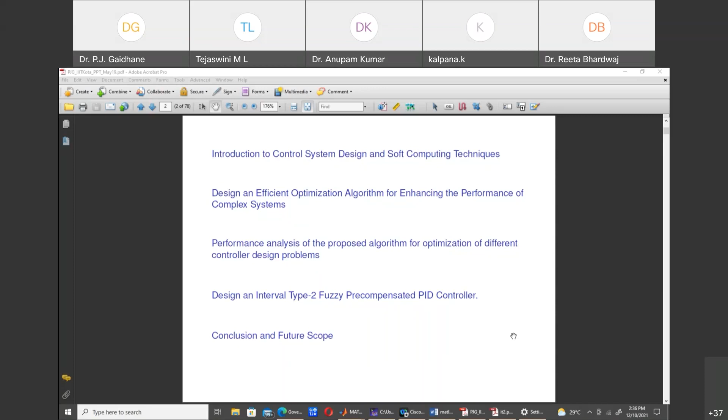After that we will see its application for performance analysis of controller design problems. Different problems we can take, and we will see how the controller designing is done using the application of these algorithms, how various parameters are enhanced or optimized using these proposed algorithms. After that, design of an interval type 2 pre-compensated PID controller will be covered. All this work is already published in reputed journals, and participants will definitely get a glimpse of how the practical application of these nature-inspired optimization algorithms is applicable for fuzzy controllers or normal PID controllers.

Initially we will discuss the basic control system design, its nature, and what the requirements are. This is a general structure of a control system, and here you can see the basic feedback control system is shown.

The controller given for controlling the system has various parameters, and that system can be non-linear, it may have different uncertainties, it can have disturbances in it, and all those things have to be dealt with when we are dealing with the system. The disturbances can be in the feed-forward system, the model uncertainties can be there, meaning the parameters of the system can change, so all those things have to be dealt with.

Again, when the actual response is given as feedback to get a desired response, some noise is also added to that—this high frequency noise, sensor noise, you can say. So all those things are added, and the controller must be designed to take cognizance of all these things and eliminate the effect of this noise and disturbance, so that your actual response will be equal to the desired one. This is the very basic thing that we use.

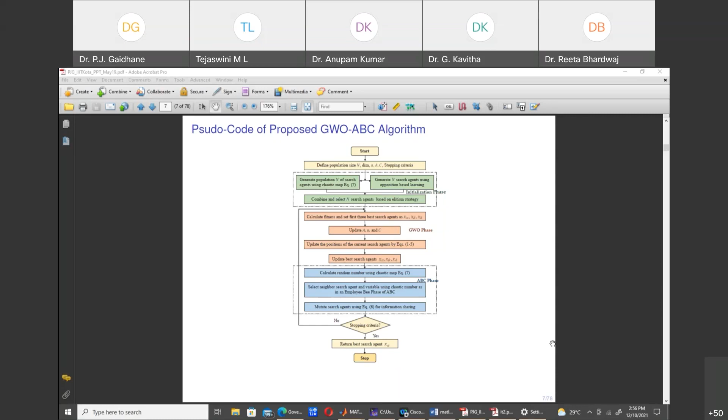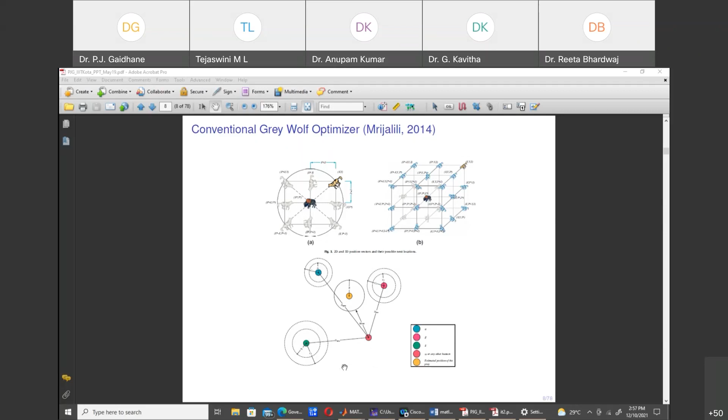So this is a mathematical model of that. Here you can see just a pictorial view, that this is the prey and how the search agents are following it. The best leaders are considered as alpha, beta and delta, and all other followers are omega. Suppose we are taking n search agents as a population, then out of that only three are leaders and the rest are considered as omega.

So first they are encircling the prey. Mathematically, the distance is calculated, this is a 3D calculation, and then x(t+1) is the value of that particular search agent in the next iteration. That depends upon its previous location, and A is some parameter which depends upon 2a·r1, and C is also a parameter. So all these parameters are defined.

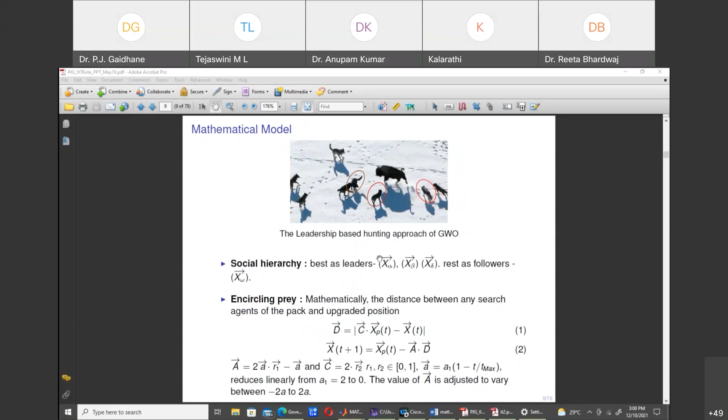Then hunting. So this was encircling the prey. Then for hunting they define some formulas, meaning the new location of any search agent will depend upon the locations of the first three leaders in the previous iteration. So here we can see the mathematical formulas which are defined for that.

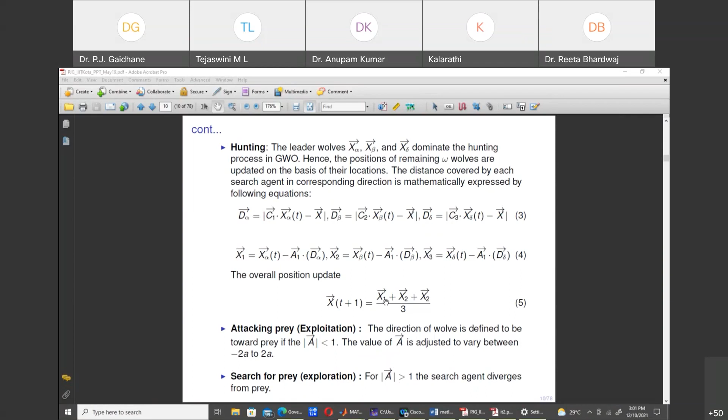Then attacking prey. After half the iterations, attacking the prey used to be done. The direction of the wolf is defined to be towards the prey if A is less than 1. In coding we define that, and the value of A is adjusted to vary between -2a and 2a. If A is greater than 1, the search agent diverges. So this parameter A always defines the way of movement of these search agents in the search region provided.

So different types of functions are taken, and it is found that only up to half the iterations do parameters A and C control the exploration behavior. So the nature of this parameter has to be varied so that it will explore up to higher iterations as well, while balancing the exploitation.

Another algorithm that we merge with GWO is the artificial bee colony algorithm, and this algorithm is inspired by the honey bee swarm and their foraging behavior. You know that they move around the food source position in search of nectar, and then they also inform the other bees. So that behavior is imitated here.

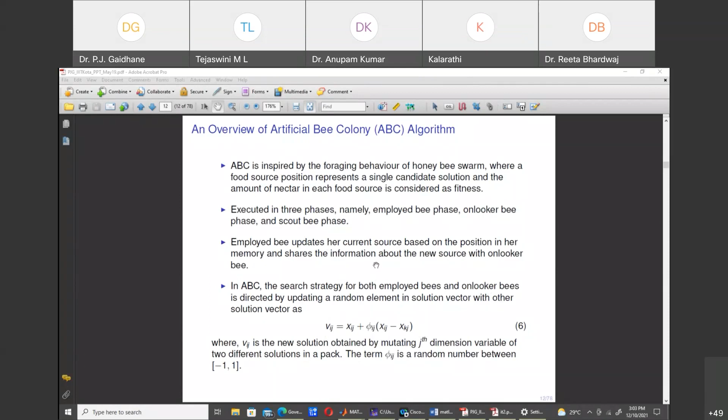Okay, and their next position will be calculated based on this formula, Vij equal to Xij for a particular bee. So these two things are merged to get an optimized algorithm, a hybrid algorithm, as we had seen in this block diagram.

Then chaotic mapping is another thing which is added for randomization. Chaotic mapping is an iterative nonlinear dynamic equation, this one as shown below, and it evaluates to generate fractals exhibiting chaotic behavior. Random based techniques are superseded by chaotic variables to avail the benefits of randomness, of chaos, non-repetition and ergodicity, because there are certain parameters in MATLAB also to generate a random number, but that randomization is also limited. So for that, there are multiple things which are added in different algorithms.

So like different randomization techniques, this chaotic mapping is also widely used. The equation of the logistic chaotic evolution function used in this work is this one. Again, there are multiple equations which define this chaotic mapping. Here, a k value of 300 is used and the initial value is randomly selected.

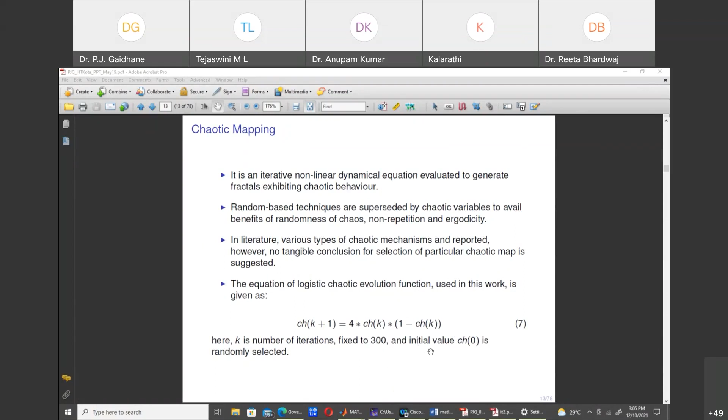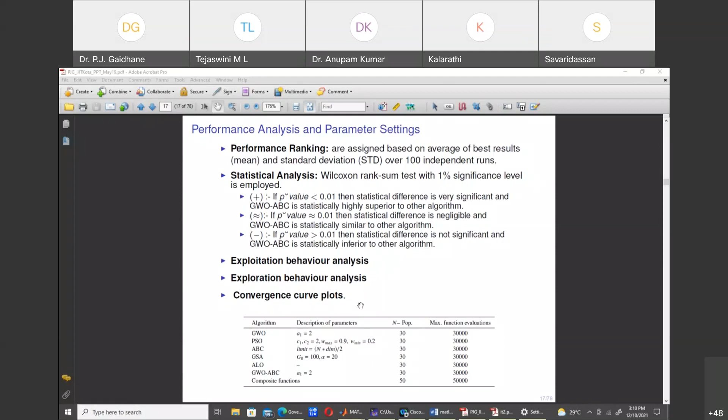So these are all the benchmark functions. There are multiple sets of benchmark functions available, their complexity has also increased, and we have to evaluate whatever we are proposing on those benchmark functions. So these are some of the functions that we used in our work. There are composite functions, fixed dimensional unimodal functions, then multimodal functions, and so on.

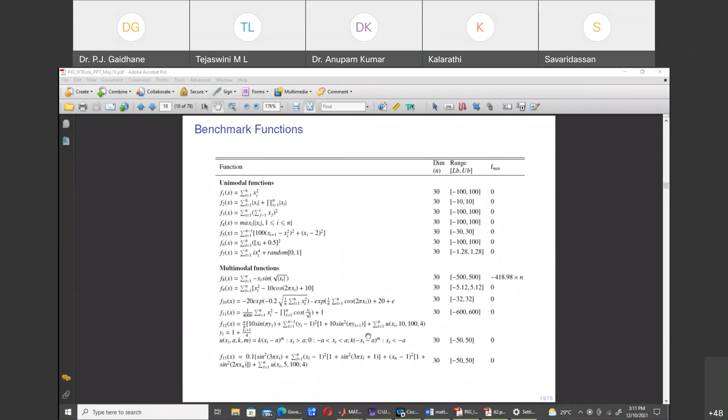These are 3D plots of those functions, and here you can see that whatever we discussed, the complete area is a search space, and here you can see that there is a single optimal value. F9, F10, F11 are multimodal. Multimodal means they have multiple peaks.

So your searching strategy should get the maximum peak only. Like in F10 you can see this green dot. So this green area is the maximum peak, the single optimal peak. But these red areas may also have multiple peaks. So your search should not get stuck in these local optima, and it should reach the final optimum. So for that, the different techniques which are used to provide better exploration and exploitation are important.

And F1, F3, F7 are unimodal functions, and these unimodal functions have a single peak. So they are quite simple to evaluate, but for these multimodal functions or composite multimodal functions like F14, F16 or F19, 20, 21, in the 3D maps you can see that there are multiple peaks, and you have to reach the optimal value. So it will be a difficult task. But if you provide the algorithms with better exploration capabilities, then they will reach that.

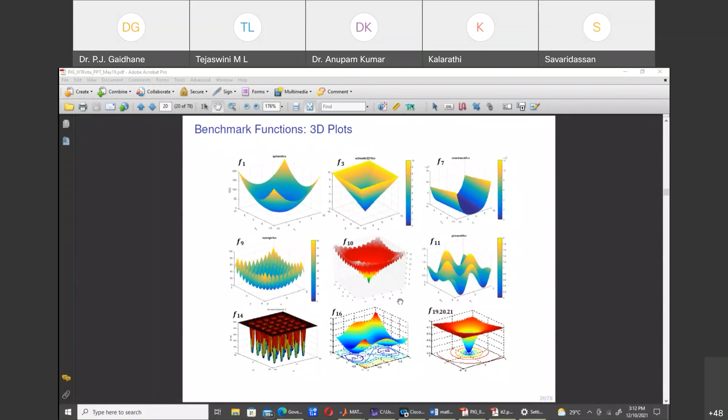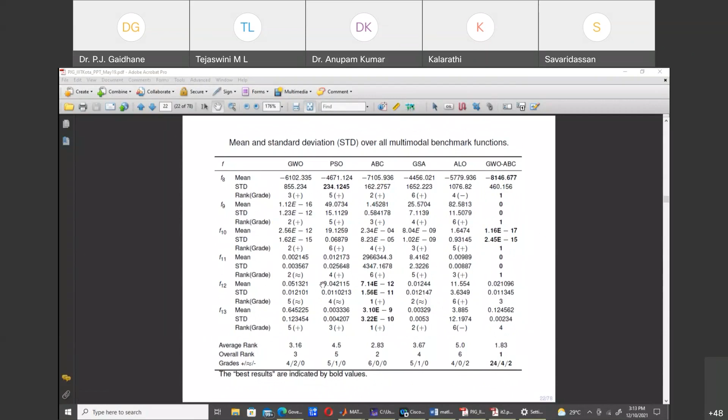These results are for multimodal benchmark functions, and here also the same logic applies. Rankings are provided for their optimal values, and then that is evaluated against others. This is for fixed dimension multimodal benchmark functions, and the same thing is repeated. This is for composite benchmark functions, and these values are given. Here you can see that the proposed hybrid algorithm has a better rank than all the previous, standard, commonly used algorithms.

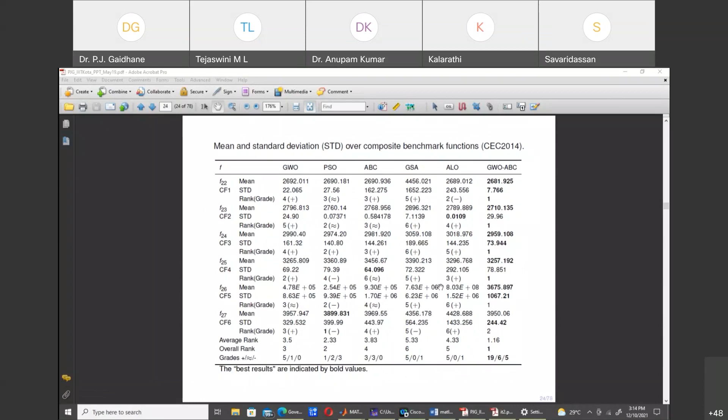This is the comparative convergence behavior for unimodal functions. Here the black line shows the convergence behavior of the proposed hybrid algorithm, and you can see that over the given number of iterations, it reaches the optimal value faster. This again is because of the different techniques which are proposed in it. So these are convergence behaviors for unimodal functions.

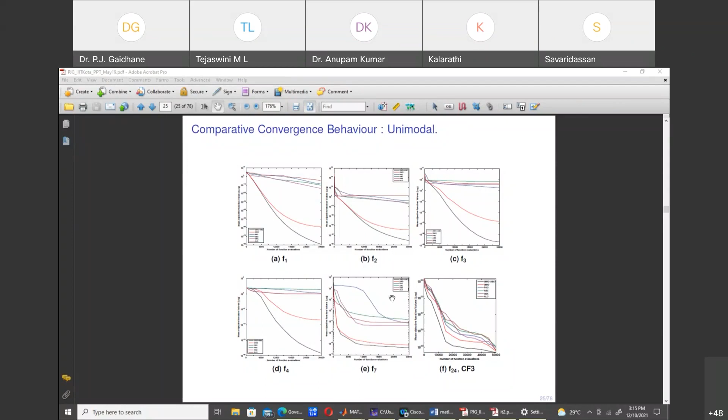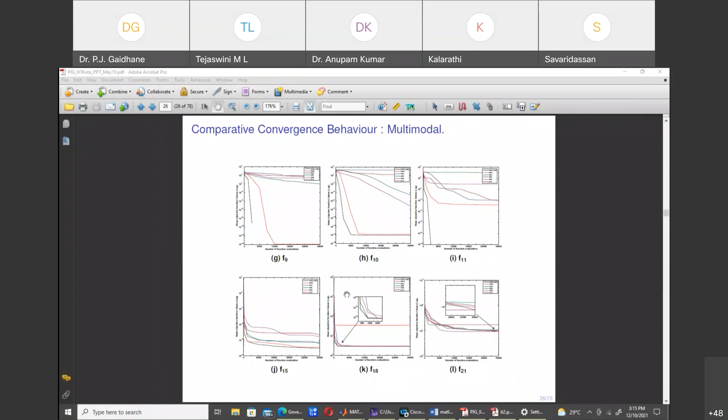These are for multimodal functions, whether fixed dimension like F21, F18, or general variable dimension multimodal functions. Then the algorithm's behavior is also checked for different controller design problems, and some standard test control systems are taken. Like first order plus time delay, this is one general transfer function of a system where you can see it's first order but it has a time delay, and then a basic controller is used, and then that is tuned.

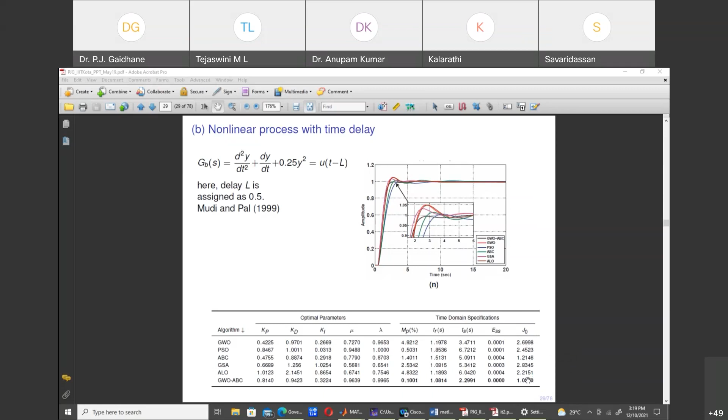Such complex systems, which are provided in different research papers, are evaluated for checking the optimization ability of the proposed algorithm compared to other famous algorithms like GWO, PSO, ABC and all that. So all these parameters I discussed earlier were plotted, and you can see that this J0, which is the performance index or performance criteria, ITAE, is optimized here.

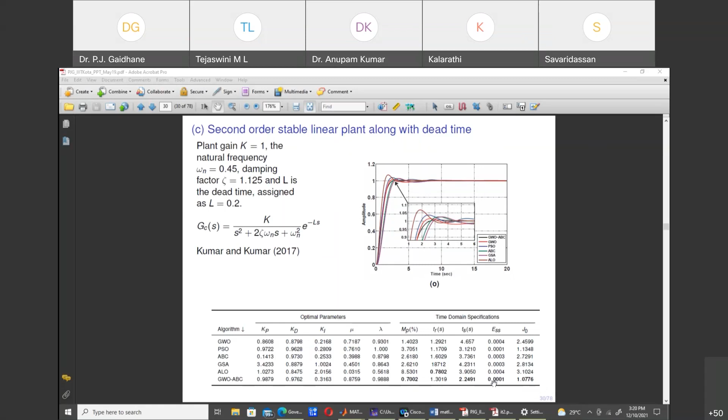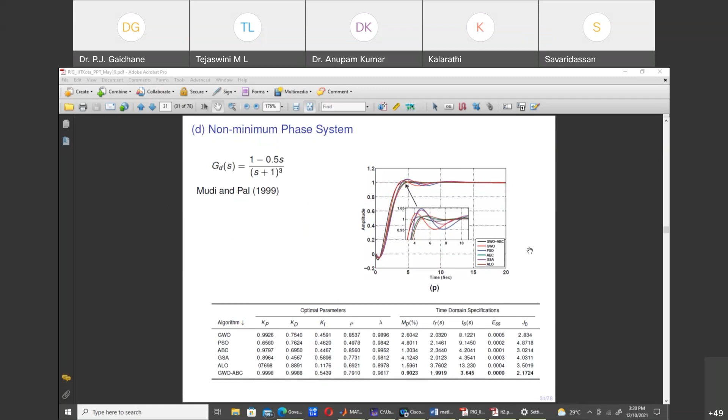The last one is the non-minimum phase system, and that system is a standard test system which is used for checking controller performances, taken from an old paper which is widely used, and these parameters are plotted. Here also you can see the same thing.

So what is J? Generally the problem definition used is in block diagram, as we have seen, based on an error. That error is defined in terms of integral time absolute error, ITAE, and then its value is calculated. Now if there are different errors, like different links, like the problem we are discussing in a later section, a robotic arm, then their weighted sum is considered as J0.

In earlier problems that we had seen, there is a single error, so J0 is just W into integral of t absolute e(t) dt. Different performance indices are also there, like absolute error, but this is selected based on the wide application and different research papers in this area.

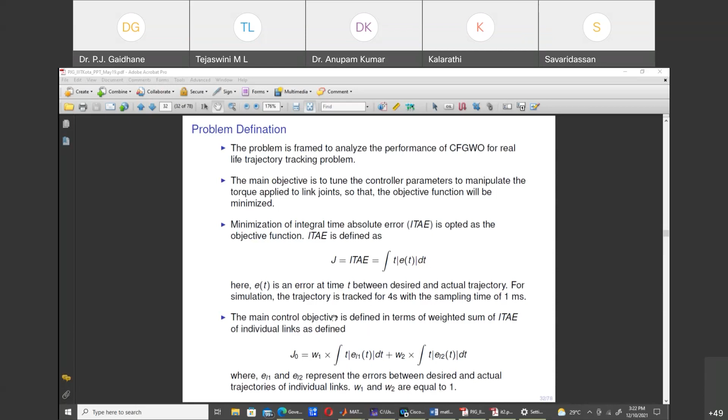Another thing that is evaluated for checking the optimization technique is a 2-DOF robotic manipulator with payload. This system is taken because it is multi-input, multi-output. It is coupled, two links are coupled, and multiple motors are there to drive it. So it's a highly complex and non-linear system.

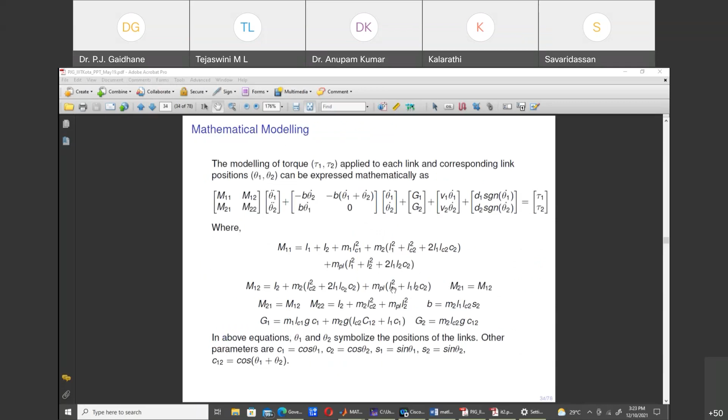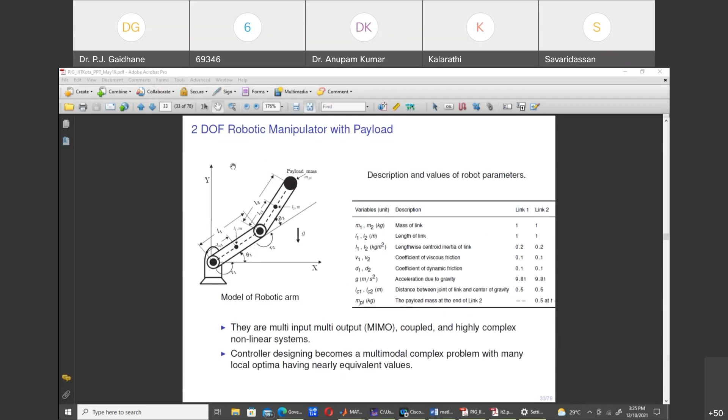On the top you can see the payload mass that is also varying, and the trajectory is nothing but the movement of this tip. So for this controller we need two torques, and theta d1 and theta d2 are the desired angles through which those links should move, and errors E1 and E2 are calculated. The performance parameter, as we discussed earlier, J0, is a weighted sum of the integral absolute value of these E1 and E2.

So we use a fuzzy logic system here. This comes to our MDP topic. We use fuzzy logic systems, type 1 and type 2 both, to design the controllers in this robotic problem. I won't go into detail since earlier sessions already discussed the basics of fuzzy logic systems. So in type 1 system, there is fuzzifier, rule based inference, and defuzzifier.

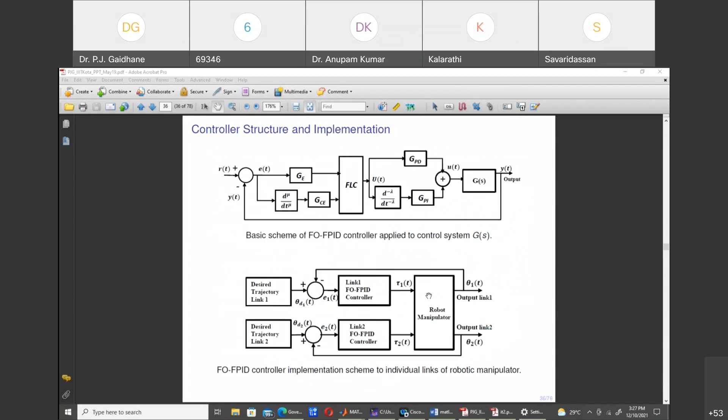Here FLC you can see, this is the PID part, and FLC is used for getting the advantages of fuzzy logic. I hope you know the advantages and all those things about fuzzy, since all the sessions were based on that. So I will show you some of the codes also used for fuzzy.

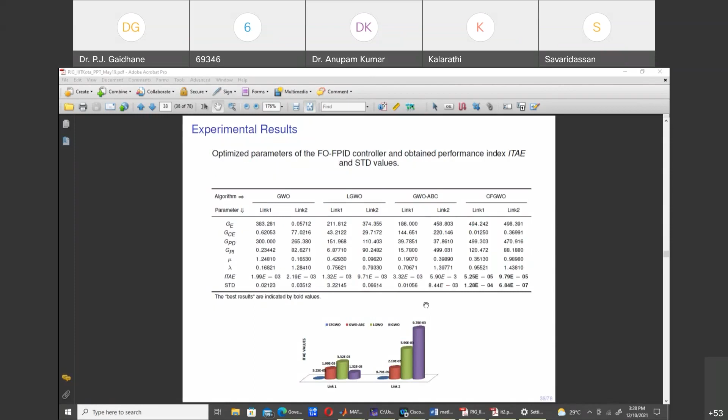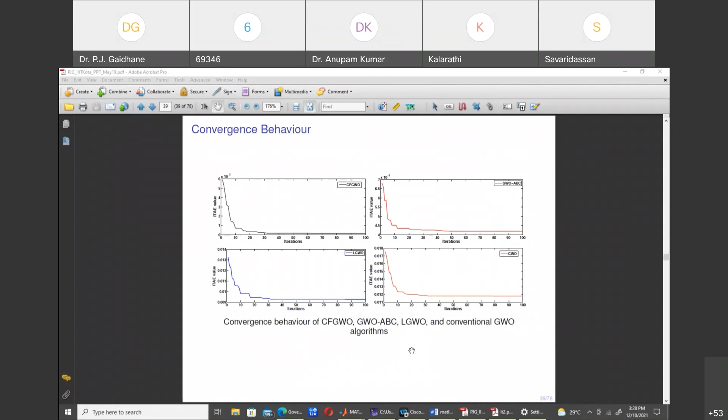So these are the results, and here you can see the proposed approach is better than the other one. This is the convergence behavior for these controller parameters. Here 100 iterations are used, and the Simulink model is used for that.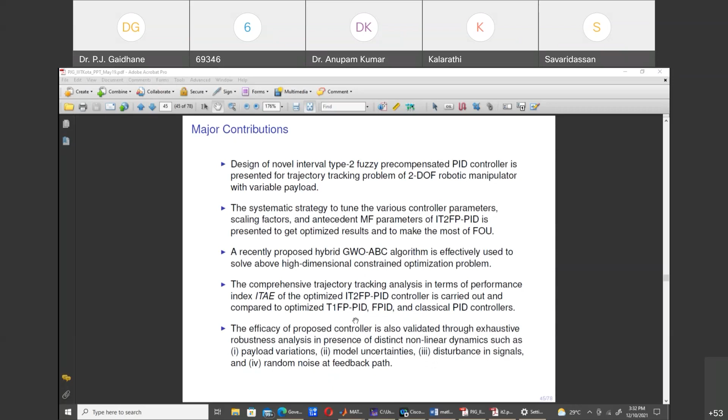This is the proposed controller, which has the IT2FLC nature. This conventional PID control is also there. This conventional PID controller is attached to an interval type 2 fuzzy pre-compensator.

Here two inputs are used, one is E and the other is CE. So these two inputs: CE is a derivative of E, or E dot, you can say delta E. So whatever error you are getting, you are having a first derivative of that.

There are some proportional parameters, constants which are defined, and these parameters are to be optimized: Ke, Kce, Ku, Kp, Kd, Ki - all the different parameters have to be optimized to get an exact value. The main function is to reduce this error Et.

Here also you can see the control parameter, control law which is defined has the same nature, Kp, basic PID nature, and a type 2 fuzzy logic controller is also added in between to get an extra benefit.

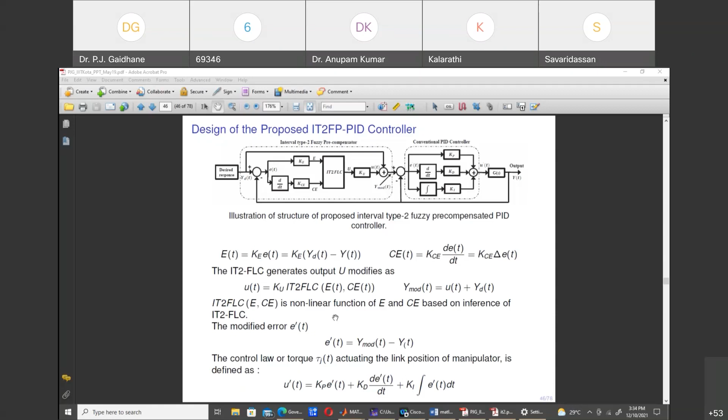If you explore this IT2FLC, you can see there are membership functions. If there are two inputs, each having three membership functions, there will be different parameters which also have to be tuned. So this controller design becomes a multi-dimensional problem, because with these inputs it means a high dimensional problem - there are multiple variables which have to be defined.

Here you can see that desired trajectories are provided and error is calculated based on the output of the particular links, until this error will be eliminated. And these different parameters of the controller have to be tuned.

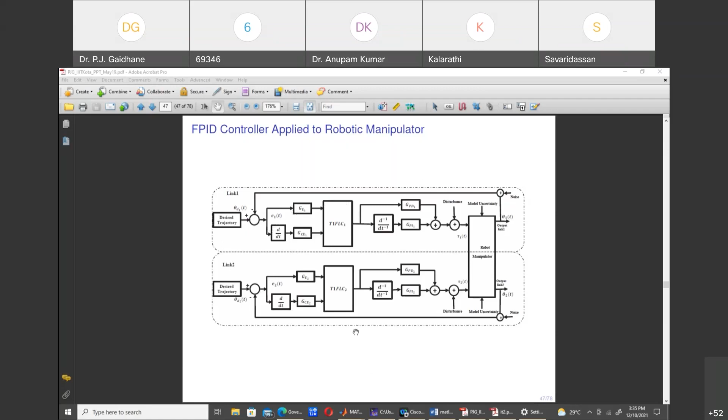This is a robotic manipulator. Two exact copies are for two links, because as I showed you earlier, there are two links, and we have to design the individual link controller based on those values.

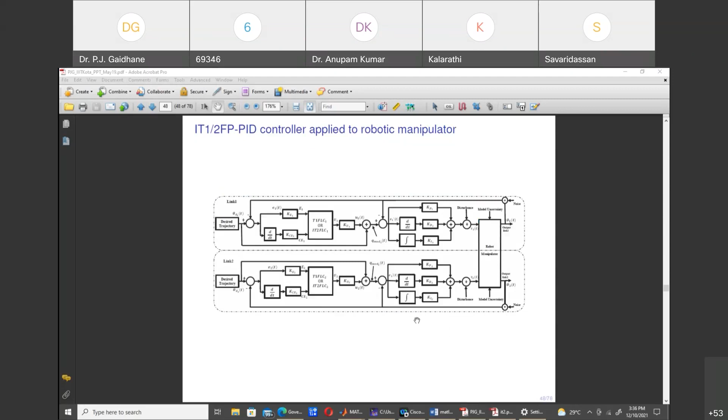So Dr. Anupam said to highlight some of the IT2 fuzzy logic toolbox. I downloaded this earlier - we downloaded it, the interval type 2 fuzzy logic toolbox, from MATLAB. If you search, you will get that. And as everyone knows, it is defined or provided by Tufan Kumbasar sir, and I think he was also the keynote speaker in this FDP, so definitely you got a glimpse of this.

Then we designed a model in Simulink. So this is the basic model that we designed in Simulink, and we use this type 2 fuzzy logic controller toolbox. So I will just shift to the MATLAB section here.

I hope you can see the Simulink model which is opened in MATLAB. I am using MATLAB 2014 version, and here once we downloaded that type 2 fuzzy logic controller toolbox, you can see this is the robotic model, and the controller is designed here. If you open that box, the controller particular, then we can see these are the...

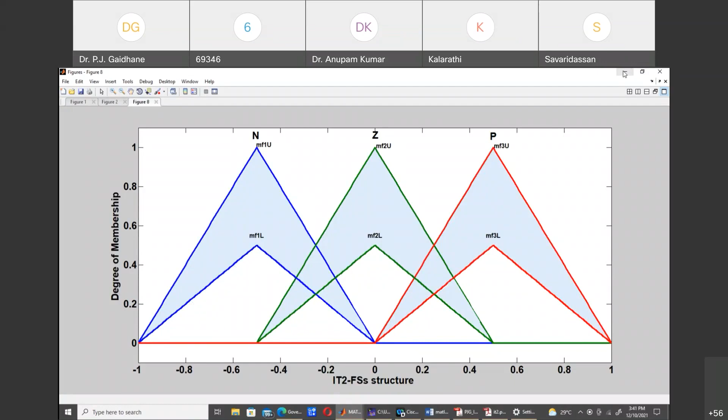So for that, optimization techniques are used. Initially we have to define values like left value, center value, and right value for upper and lower of each cell, like N, Z, and P. There are three membership functions, each having two layers, upper one and lower one, and then there are three parameters defining them, like height, and then left and right.

So that we have to define in this FIS file. Here you can see, so for one input there will be 6 parameters. One is varying from -1, -0.5 to 1, this is left one, this is right one value, and middle one is the center value, height you can see. So lower is having 0. These values are there.

MF1U, MF1L, so one upper, then one lower. Two values are defining its position. Same thing for input 2, and then output, they are generally constants, and their values are -1, -0.80, they are defining, and then rule base. Rule base is also defined in this .fis.

It is same as that of the type 1 file. This is T2 FIS. I was having .fis also. Yeah, it's here, it is for type 1 fuzzy. Here also you can see, only the thing is that the membership functions have a single layer, single value. It does not have FOU within it. So that's why these left and right values are provided here.

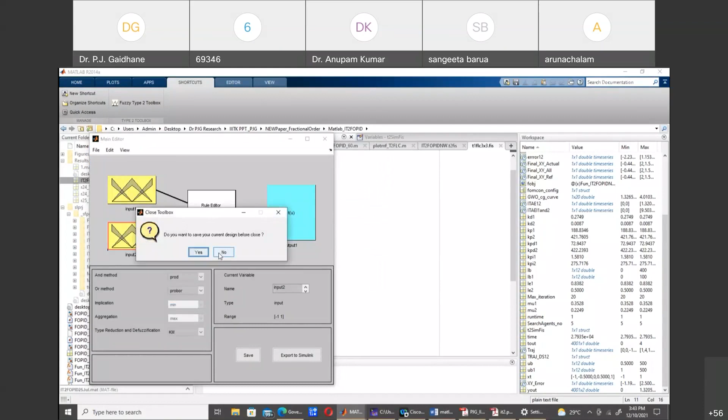These are the different type 2 FIS files which are provided or already used by me. So I will take this one. Okay, so this new thing is created. Here if you click on this, you will get the exact nature of that, whatever is defined there. There are 2 layers of type 2 membership functions, and their names are MF1U upper, lower, upper, lower, upper, lower, 1, 2 and 3, and for another input also the same thing.

So these things can be optimized if you define the widths, meaning different parameters, and ask that particular control system, the algorithm, to tune these parameters. So this width can also be tuned, and in our work we tune this width also.

The nature of output is like this. They have single value, some singleton outputs are there, and they have values at minus 0.8, 0, plus 0.8, and plus 1.

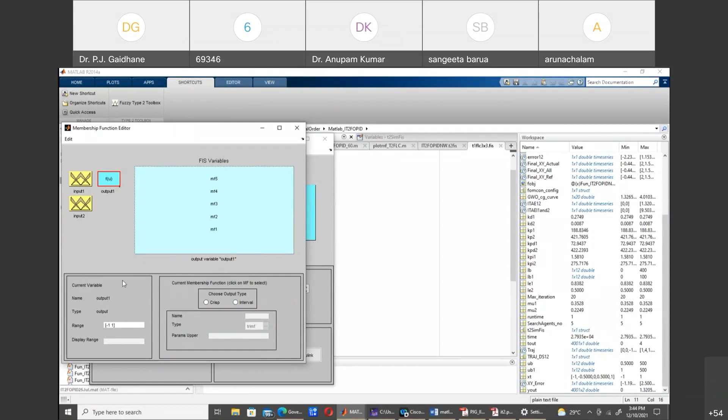Okay, the rule base edit, you can, okay, this is the diagram. You can view the surface, meaning rule base nature also. I think it will come here. Okay yeah, this is the surface plot of that interval type 2 fuzzy logic design. If you close this, you will view once more.

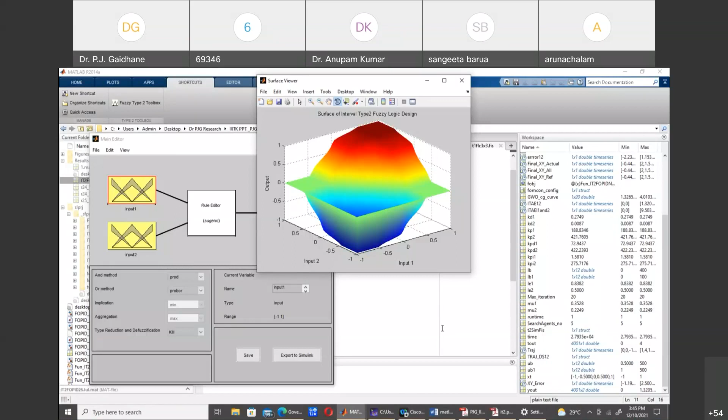Okay, it appears. So here you can see, and different parameters also can be designed by you. Like you can edit at variable also, like if you want to add an input, a third input can be added and its nature can be defined.

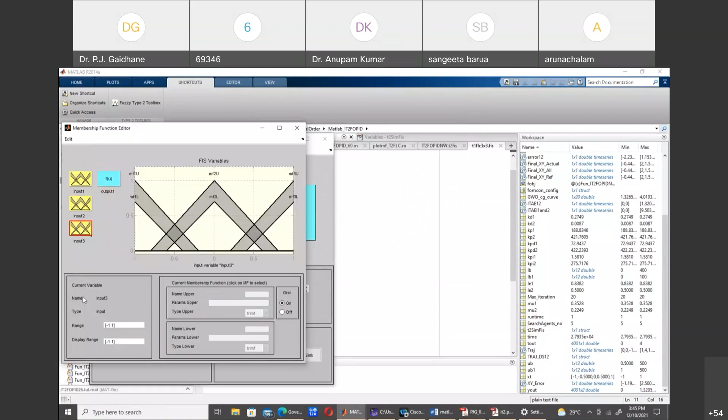Here you can define that particular nature. Like if you consider this one, then left one, right one, middle, the values can be defined, and then you can generate the .fis file for that also. Like file, you can save that to the workspace, then that .fis file will be stored there, and that can be used for later work.

Okay, so you can design the new one also. Like if you take a new FIS, we'll take it here.

I hope it is clearly visible to you. Yes, visible, sir. Okay.

So I think earlier we had to delete. I'm worrying because if I play more, there might be some complications. That's why it's okay. But new FIS we added. Then we can adjust this thing. If you open it, if you select a particular thing, here the values will come. You can say on off grid, like grid is a normal thing. But this mf1U, these values you can vary. This height and all those things, I think you can vary, and by variation of those things you can adjust those. And then the middle one,

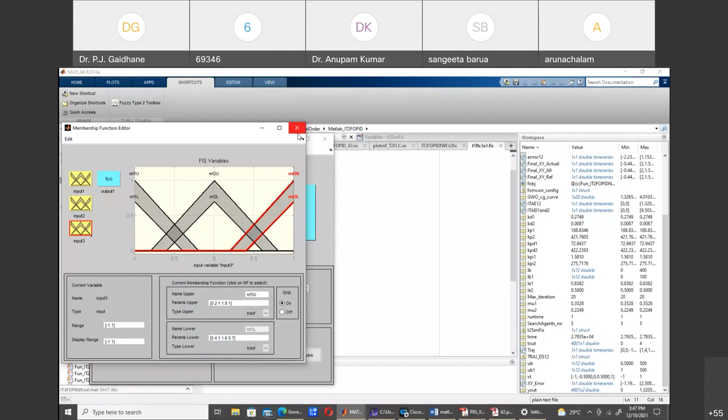then the right one. And here we can define the different layers also, means you can add variables, inputs, you can add the membership functions. There might be some limitations also, but whatever general given type 2 is also working well, and we already worked on that, and the width of this thing is optimized in our work. Okay, so after adding all those parameters, if you save this to the FIS file, like save to file, some random name we will give. But its extension will be .T2FIS.

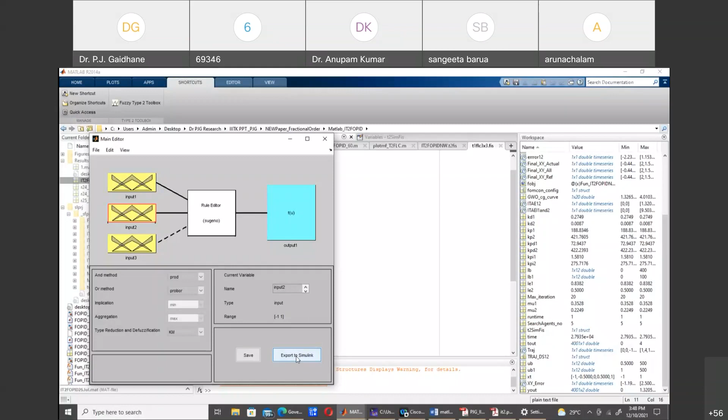Only .FIS for single fuzzy, type 1 fuzzy. Here for type 2 fuzzy, this T2FIS is used. Or export to Simulink also you can do, and in a Simulink model you can use it like this. Then rule base also can be defined here. If you click on the rule editor, you can change these values for a particular rule base 1, 2, 3, and here values can be varied.

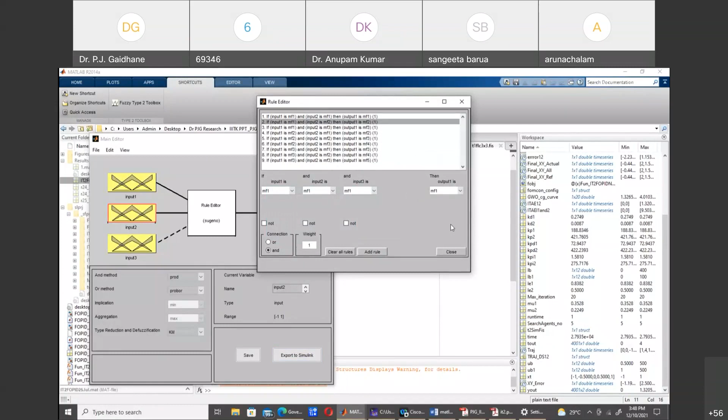The weight can be changed, and I think Tufan sir's website is also opened earlier. Here the things are given in a proper way. The latest version is also provided. What I am using is some old one, but I think that is working properly. So if your system is okay, then definitely it will work. So here multiple things and every detail are given. If you keep on playing with this, you will definitely get that.

Actually, sir, as per Tufan sir, that toolbox is not working after 2019B. Maybe some technical issues from MATLAB. Okay, okay. Yes. My version is 2014. Yeah, great, sir. That's why I told you that you can use an older version. But all these results, again, I'm telling frankly, are 2-year-old results. I have to work and check if currently it is working or not. But mostly the things are looking fine. Great, sir. Great.

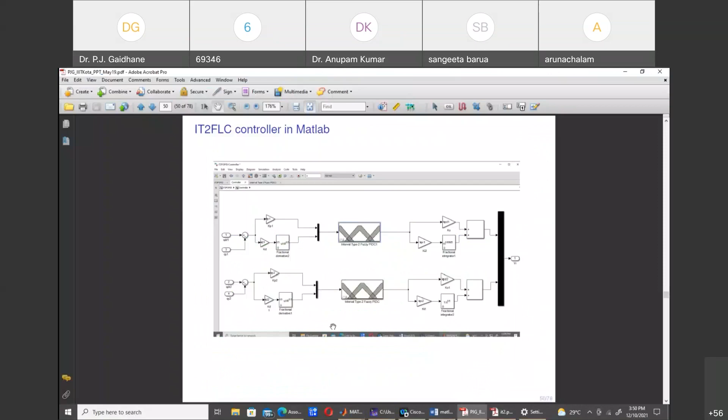For input we use 3: positive, zero and negative, and for output 5 crisp singletons are used, and the rule base is defined so that we get a particular combination as required. Here you can see the different parameters; these are scaling factors of the controller. We propose this IT2 FPID, and this T1 FPID is also compared; earlier researchers proposed it. So we also optimize the parameters of that type 1 fuzzy.

Here you can see that for link 1, if there are 3 inputs, 3 into 3 means 9 parameters: left, center and right. I'm talking about the structure of the membership function. Each membership function has left, center and right parameters, and they are optimized. So 9 parameters for link 1, then these are the controller parameters. So 9, 9, 18 and these 6 means 24 parameters are optimized for type 1. The same way 24 for link 2 also. Means total 48 parameters are optimized in our work for the controller.

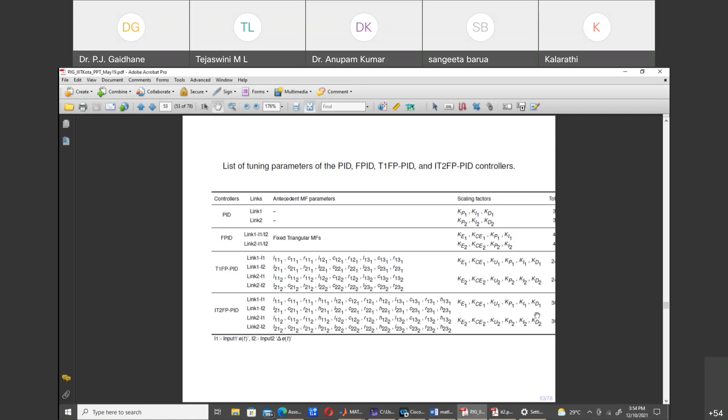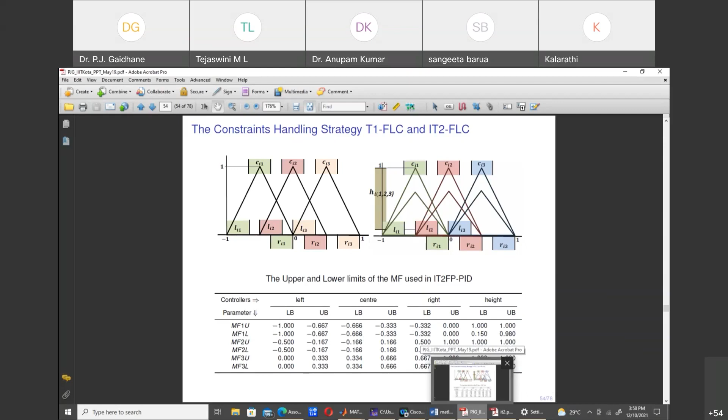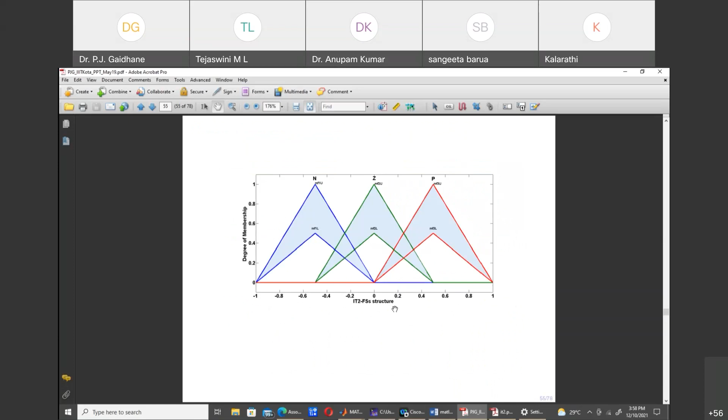Okay. The left one is going up to 0.667, then the center 0.666 to 0.333, and the right one is from 0.3 to 0. Okay, means we divided that one space in 3, and then we adjust them. This is the general IT2FS structure, the standard one, which we generally use also, but its structure is not optimized. It's actually given.

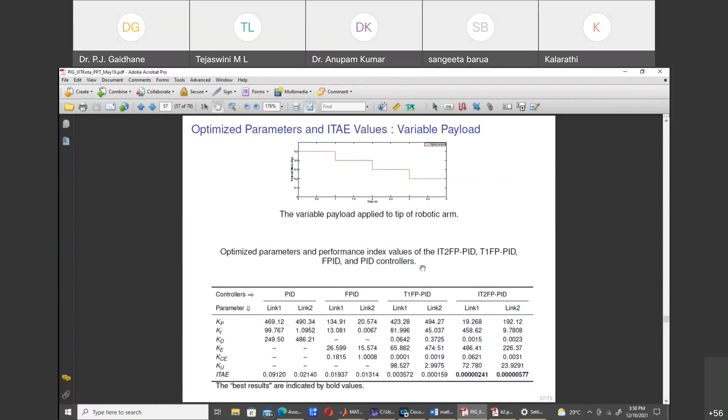And again, those who are dealing with optimization algorithms know that in different iterations the value varies. We will get different results in different runs. We have to run the optimization algorithm multiple times, and here we have some 20-30 runs. In each run the algorithm will evaluate it for 100 or 200 iterations, and out of all those runs, whatever optimized value we are getting, that we presented as a result.

So it's in every paper or every researcher's experience that in a single run we can't claim that we are getting the best values or best results. You have to work on that. We have to take multiple runs, and out of those multiple runs we will get the best values. So here in the paper you can see how many exact runs and all those things are given. Some 20-30 runs we have evaluated. So these are the optimized antecedent MFs that we are getting for type 1.

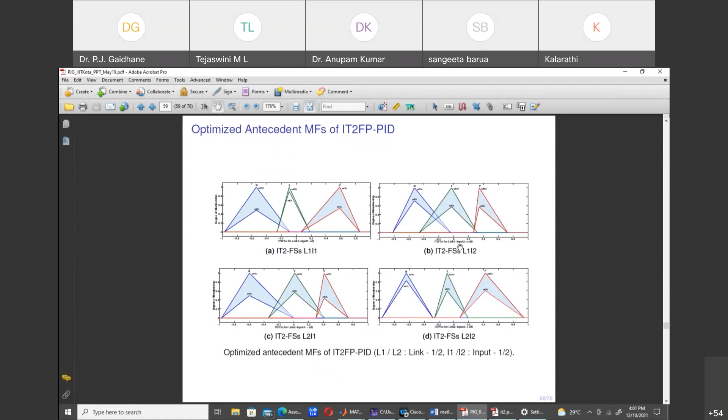So here the results can be seen. Again, these are the best results in the multiple runs that we evaluated, and these are the results. Again, these are simulation results. After getting these optimal values of membership functions and the controller parameters, whose values are tabulated in further slides, we plotted the results of XY coordinates of that robotic manipulator, and here you can see after zooming that we get the best results using the proposed controller for the proposed algorithm.

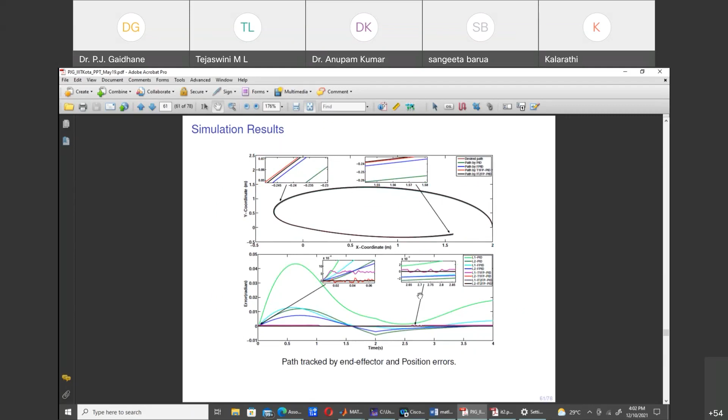These are some error versus time, y coordinate versus x coordinate. This is the whole trajectory path by the tip of the robotic manipulator, and this is also provided here. These are the values of performance index ITAE, and we are getting the least values for the IT2 FPPID controller that is proposed. Here we compare different types of controllers.

Earlier, when we proposed the algorithm, we compared different algorithm performances. Here we propose the controller. So here you can see how type 2 has less error than type 1. The controller is the same, type 1, then pre-compensated, then PID, but type 2 has better performance values, and the error ITAE values, which is a weighted sum of individual link error ITAE, is minimized here.

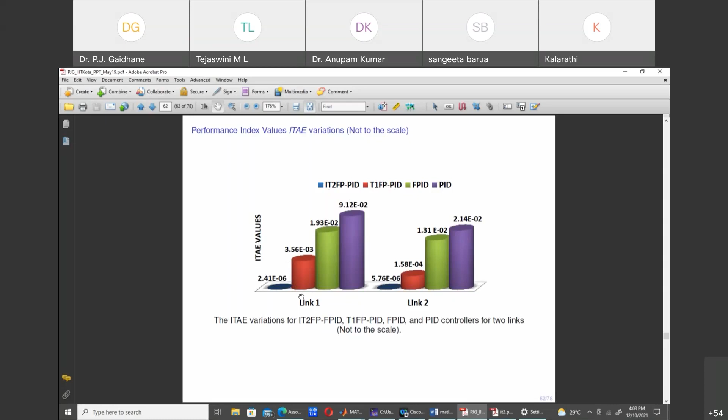So other analysis, means only one analysis is not enough. So comprehensive robustness analysis is done through performance index ITAE, the bar chart you had seen. Then plots of desired trajectory tracking, XY coordinate path plots, then plots for position errors are also shown.

Now other uncertainties are used, like external disturbances, random noise in the feedback path, external disturbance of low frequency used individually in both the links, and model uncertainties, meaning we vary the values of mass, length, coefficient of viscous friction, whatever is there in the mathematical model of the robot. Those values are varied by some 20% or 5% as per the literature survey and the possible values, and then the results are plotted or noted.

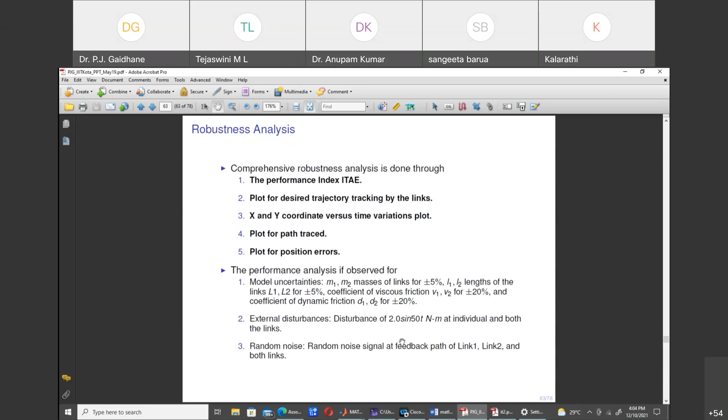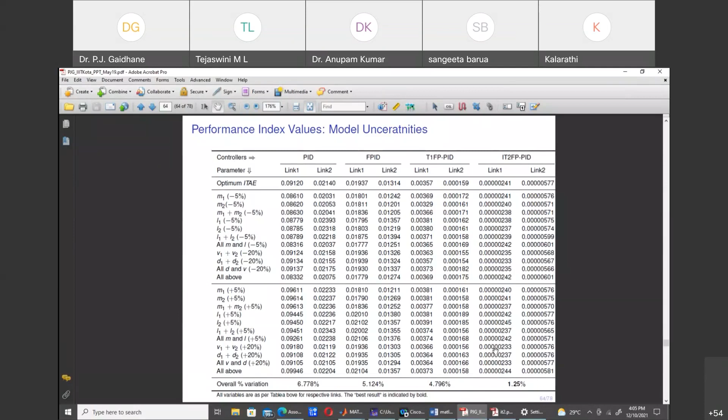Here we have model uncertainties: the values m1, m2, all those parameters which were fixed earlier are varied, and then we plotted the same thing, and we got the least variation. Overall variation is 1.25%. So it's in an acceptable range, and it's the minimum variation controller, because FOU is added in type 2, so that is the benefit of the type 2 fuzzy logic controller, that it will handle the uncertainties in a better way. Here the results are also saying the same thing.

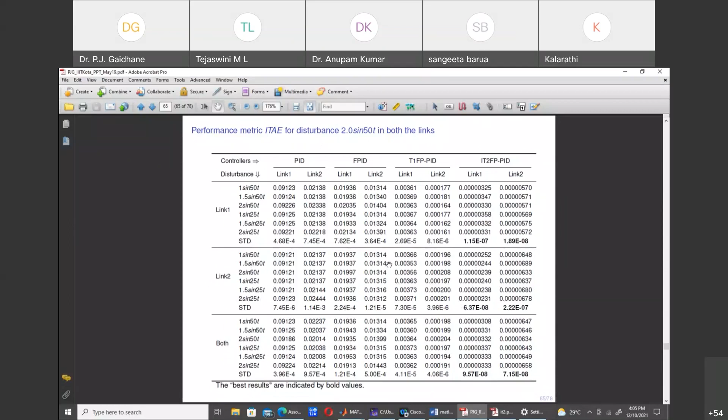Then disturbance is provided, different values of disturbances, different amplitudes, 1, 1.5, 2, frequency also varied, 25, 50. Then also we are getting the least values for the proposed controller, and I think credit goes to type 2 fuzzy logic. These are some of the plots.

So this way we can conclude that the structure of MF of IT2 FLC has been optimized to acquire maximum benefit of FOU. The FLC based pre-compensator provides a control signal to compensate the undershoots and overshoots. Then payload variation, model uncertainty, random noise, disturbance, all are also eliminated, and the system is robust. The controller designed is robust. The different plots and different tables are showing the same thing.

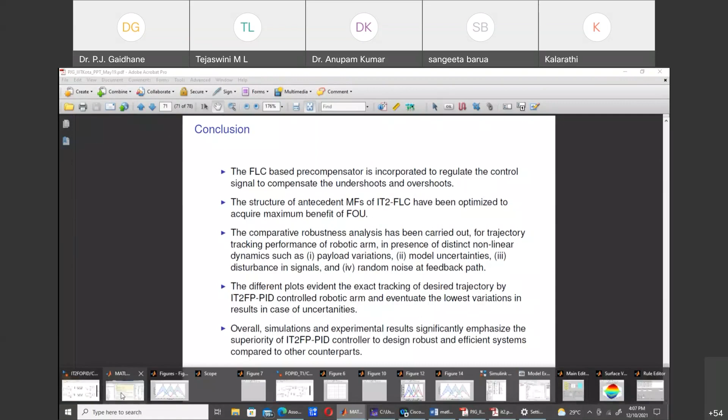So with this, I come back to the MATLAB part. So this is the model of the simulation. If you go one up, this is the robot, and I opened one best result here in the workspace. For that, we can plot this. This is a control parameter which is varying.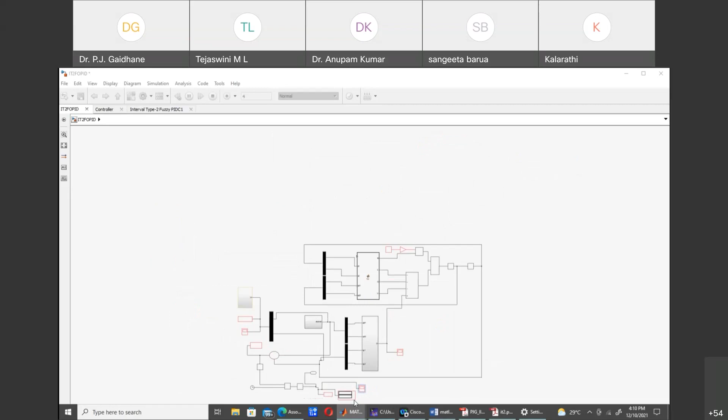Here you can see the value of error is going on reducing. Here is ITAE, the main performance index. Yeah, this value is varying. This is for link 1 and link 2.

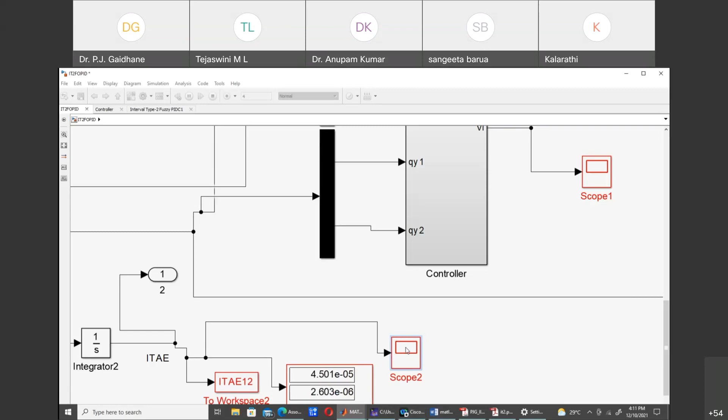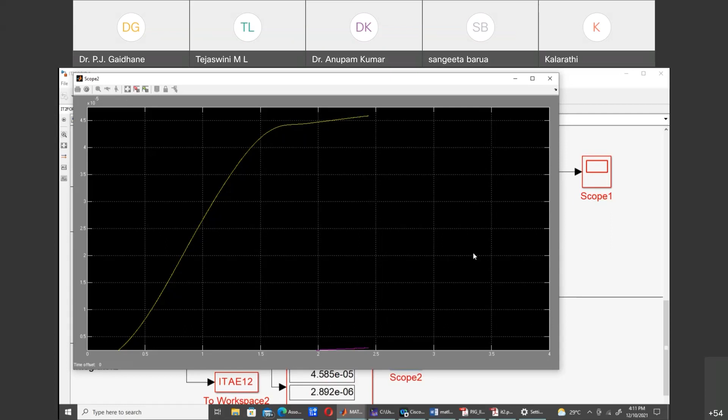So we run this; our trajectory is defined for 4 seconds. So it's up to 2.5 seconds. So though the trajectory is moving for 4 seconds, it will take a few minutes to execute the code. Actually, this is run for the optimized values which are already stored.

This is a control signal. If you can see, this is a control variable which is also varying. Earlier the control had more oscillations, but for link 1 and link 2, yellow is for link 1 and the pink one is for link 2. It's also getting a little bit stabilized.

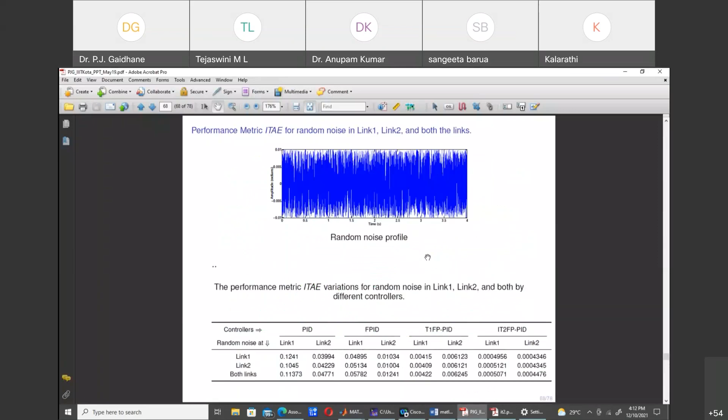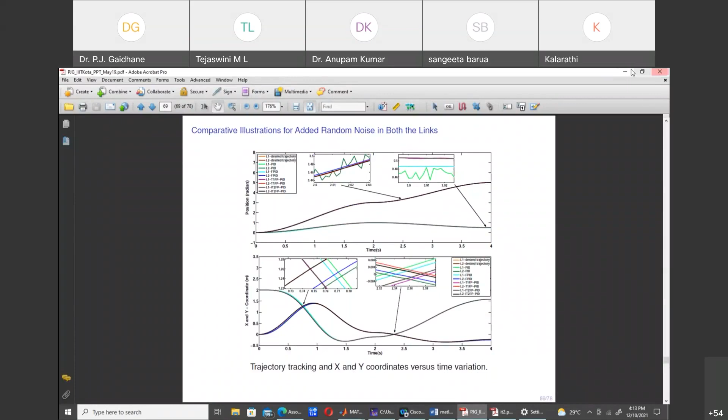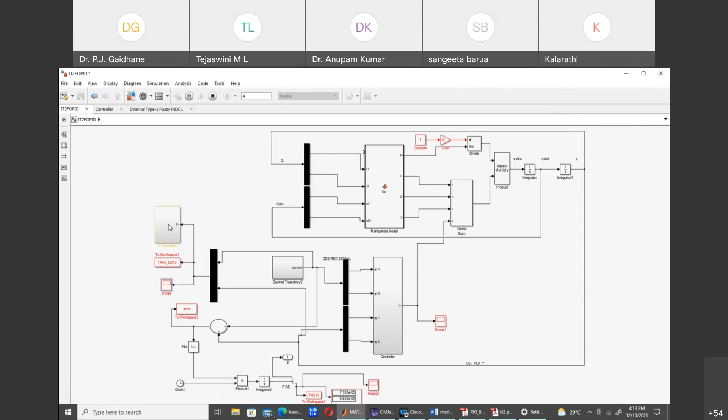This is the trajectory path, if you can see. So in the plots also you had seen the trajectory, position versus time. These are plotted for 4 seconds. So that graph you can see here. This is for the output only, and the comparative graph is plotted in a different way. Here the values vary. Here also you can see the error, which after multiple iterations is going on reducing.

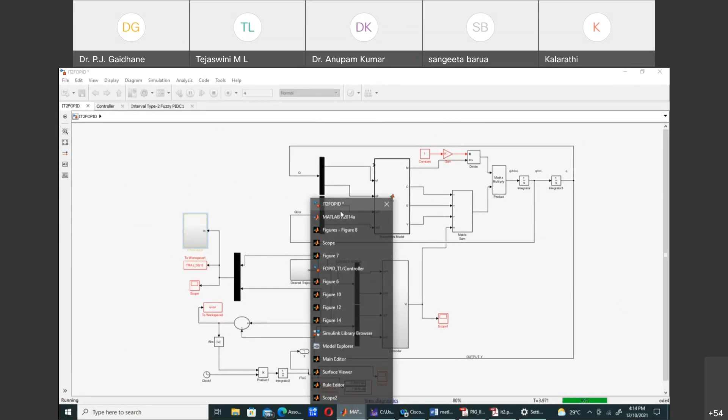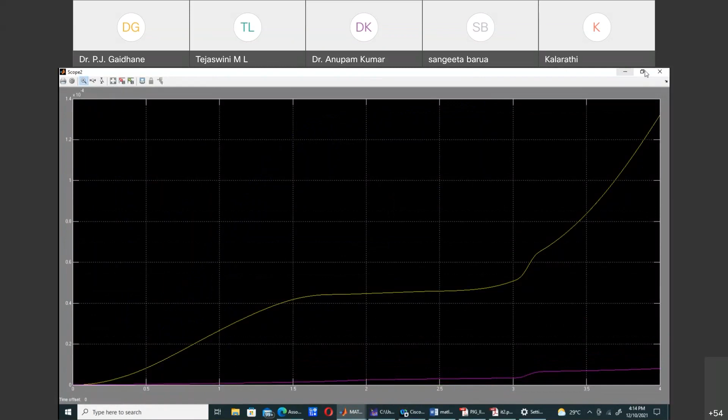Okay, here you will get the final result. This is the trajectory and this is the final value of the error, you can see, which is minimized. Here is the way it varies. Again, other graphs are drawn individually; they are not added in the scope. Here is the model of the robotic manipulator, and it is linked to the editor file.

The algorithm code is also available on Mirjalili's website. He designed multiple algorithms based on the nature of different creatures, and those things are also there. Okay, here we defined multiple parameters. As I told you, there are 30, 60 parameters. So here how the parameters are defined can be seen.

The earlier ones are KP1, KD1, KU. These, 1, 2, 3, 4 up to 12, are controller parameters. And other parameters are for input. And if you are using this IT2 FP FIS L1, this is the file name, the T2 FIS file name. So whatever FIS file you are naming, like IT2 FP PID FIS L1, then it's the input one. Here the name is different, but the nature you can understand.

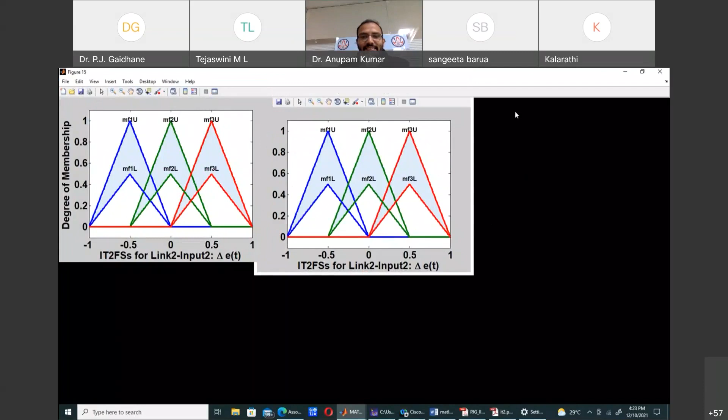Then plotting the optimized membership function also needs some code. Whatever results we are getting can be plotted here, and you will get that plot. Okay.

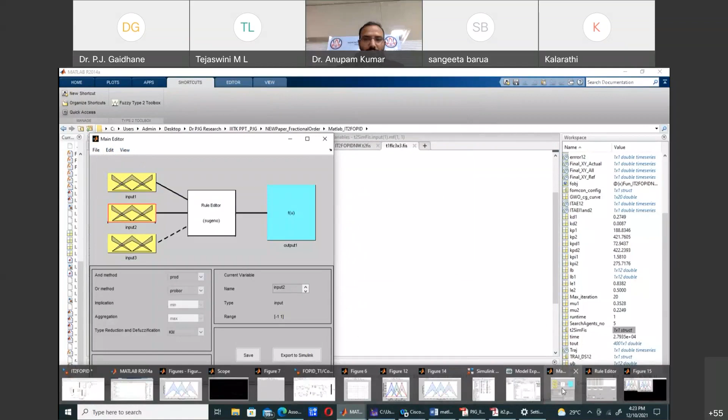Okay, with this, Dr. Anupam. Sir. So with this, I think I covered whatever I had about the type 2 fuzzy logic controller. Yeah, all the basic things related to type 2 and the implementation as well as the coding part, everything you have covered. So if there are any queries or questions, any participant can ask.

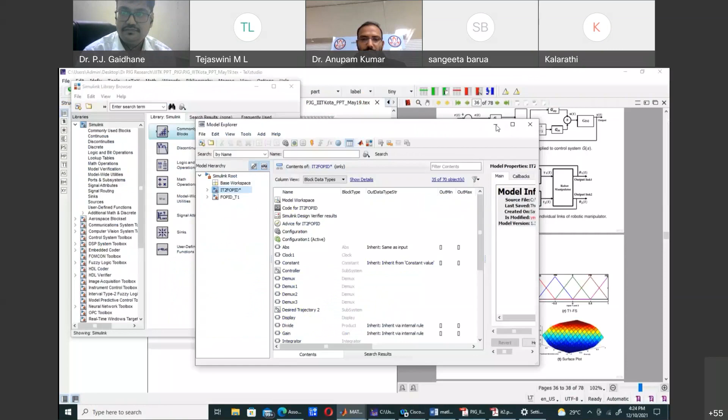Any query related to MATLAB implementation and how to implement, etc., you can ask. No participant is asking about the implementation part. I hope you have cleared all the doubts in this session. I think no one is asking. Okay, sir. Yeah, maybe there are exams. Okay, then